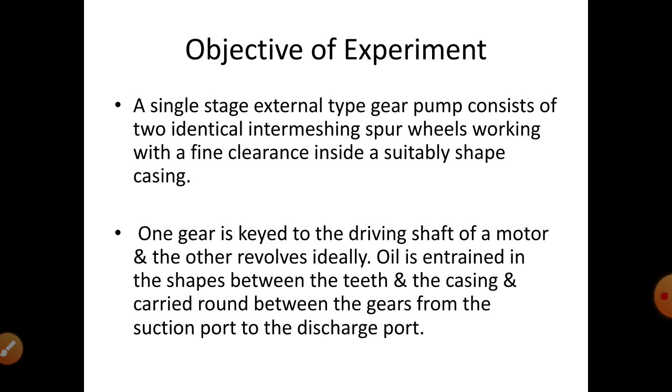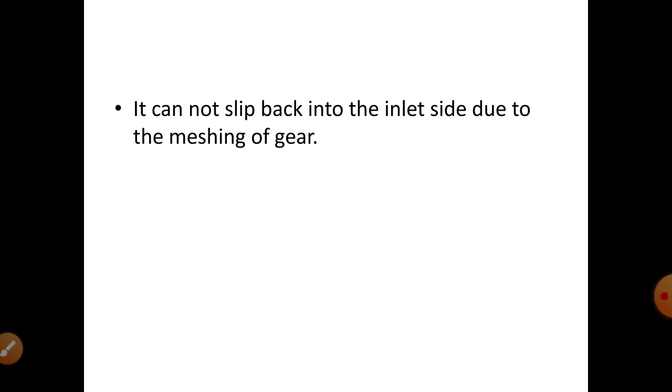Oil is entrained in the space between the teeth and the casing and carried around between the gears from the suction port to the discharge port. It cannot slip back into the inlet side due to the meshing of the gears. Those are the objectives.

So next is procedure. First point is fill the SAE 68 oil in the oil sump up to 3/4 of the 50 liter tank. Second, keep the gate valve fully open on the discharge line. Third, start the motor. Fourth, note the pressure gauge reading, capital G.

Measure the time for 5 pulses of the energy meter by means of a stopwatch. Next is the time for 10 centimeter rise in the collecting tank by means of a stopwatch. Then the difference of level between the pressure and vacuum gauge; we measure the level between the pressure and vacuum gauge.

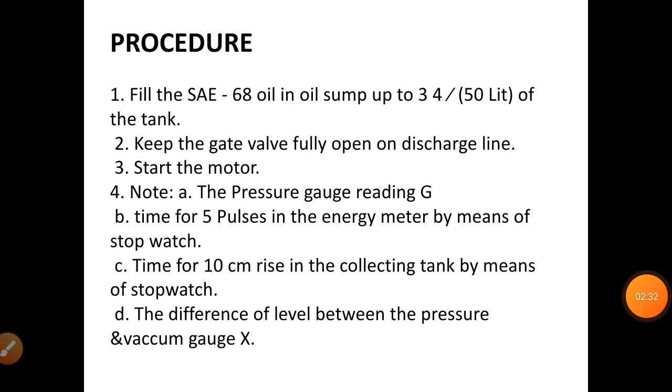Next procedure point is take at least 4 sets of readings, varying the head from maximum at shut off to minimum where the gate valve is fully open. This can be done by throttling the delivery valve. The suction side is 1 diameter and the delivery side is 1 diameter.

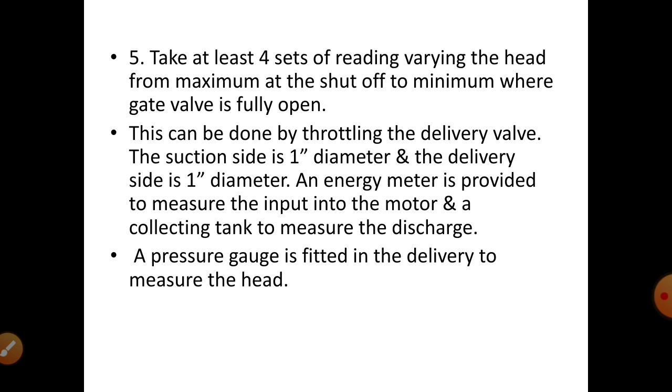An energy meter is provided to measure the input into the motor, and a collecting tank to measure the discharge. A pressure gauge is fitted in the delivery to measure the head. Note the pump set will be full of oil while starting. For this reason it should not be allowed to drain, and hence it is mounted in such a fashion that it remains full of oil at all times.

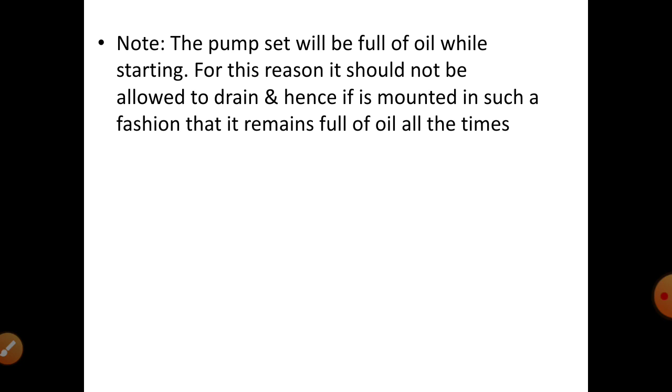So next point is observation. First these are the specifications. First one is area of measuring tank, capital A, is equal to 300 multiplied by 300 mm square. Second point is energy meter constant, denoted by capital N, is equal to 3200 pulses per kilowatt hour.

Next point is the level difference between vacuum gauge and pressure gauge, indicated by capital X, equal to 600 mm. So this is the observation: area of measuring tank capital A, energy meter constant capital N, and level difference between vacuum and pressure gauge capital X.

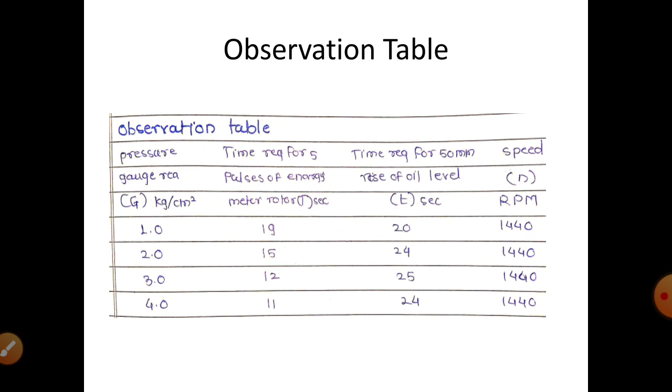Next one is the observation table. In the observation table we observe the pressure gauge reading capital G, unit kg per centimeter square, and time required for 5 pulses of the energy meter, capital T in seconds. Next column is time required for 50 mm rise of oil level, small t in seconds. And fourth column is the speed in rpm.

First reading: pressure gauge reading is 1 kg per centimeter square. Time required for pulses of energy meter is 19, and time required for 50 mm rise of oil level is 20 seconds. And speed is constant, 1440.

For the first reading, pressure gauge is 1 kg per centimeter square. For the second reading, we set pressure gauge 2 kg per centimeter square. Third reading we take 3 kg per centimeter square, and fourth one is 4 kg per centimeter square. So this is the observation table. Total 4 readings we take, and it is shown in a table.

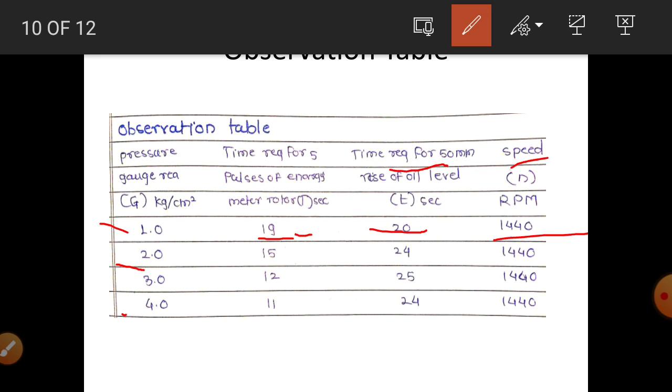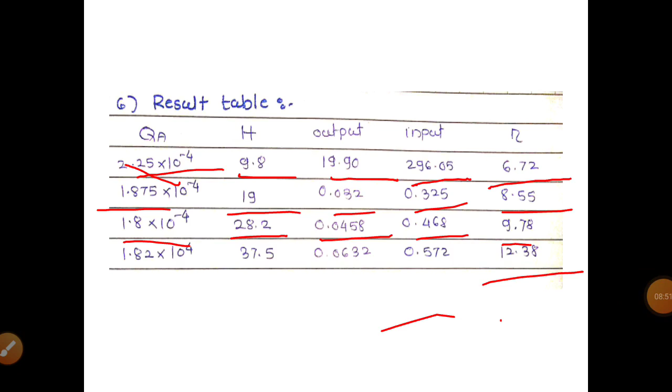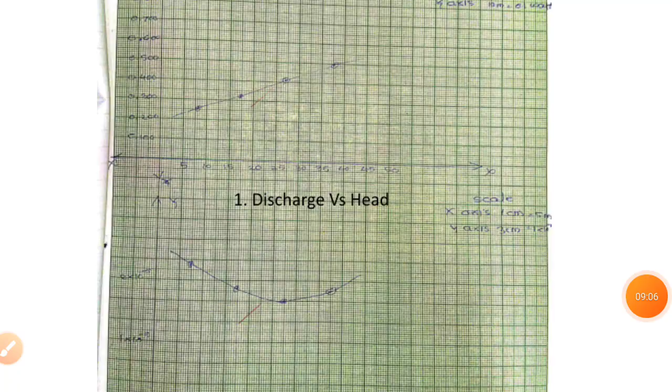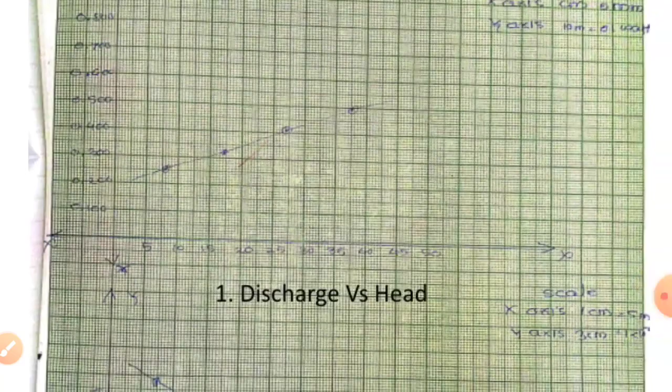From the result table we draw the characteristics of a gear pump. Total 4 readings we take and find the efficiency. The first characteristic we draw here on x-axis and y-axis is discharge versus head. So this is the discharge versus head plot.

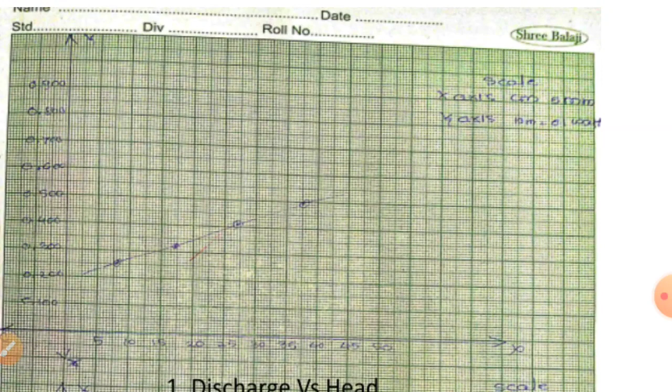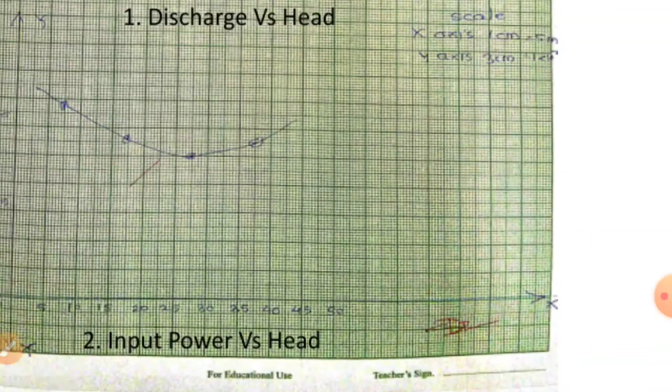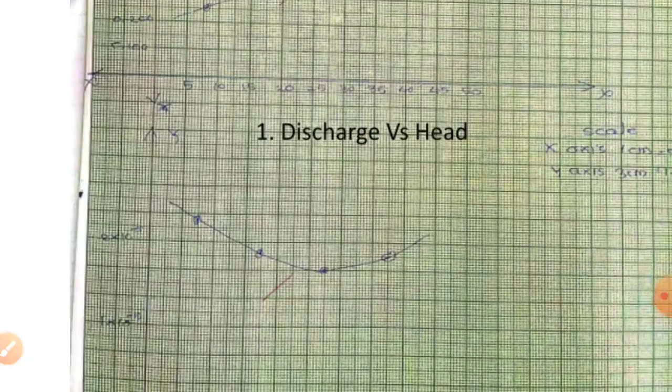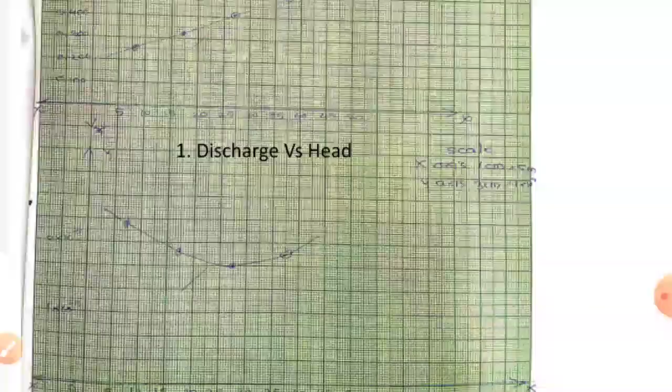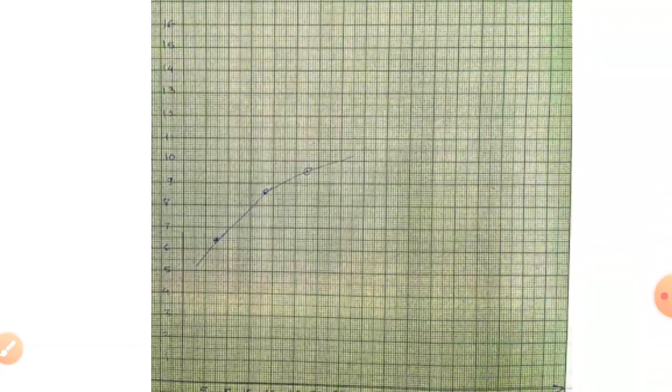Next characteristic we draw here is efficiency versus head, efficiency of a gear pump. This is the third characteristic, calculated by using the result table.

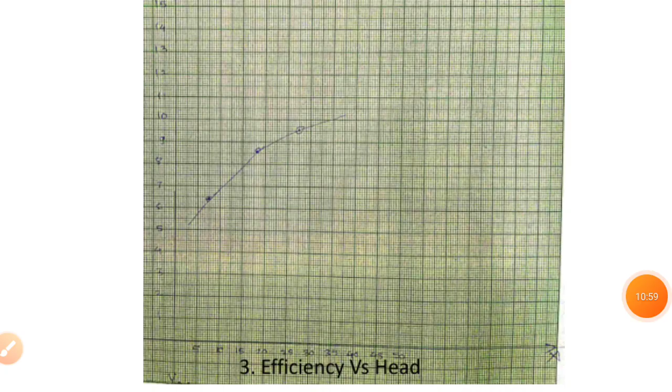From these characteristics, we conclude that in this experiment, first, if we increase the head, then at some point the graphical representation is not continuous, and second, there is a sudden change in the graph. Therefore experimentally we find different characteristics compared to theoretically. So this is the conclusion.